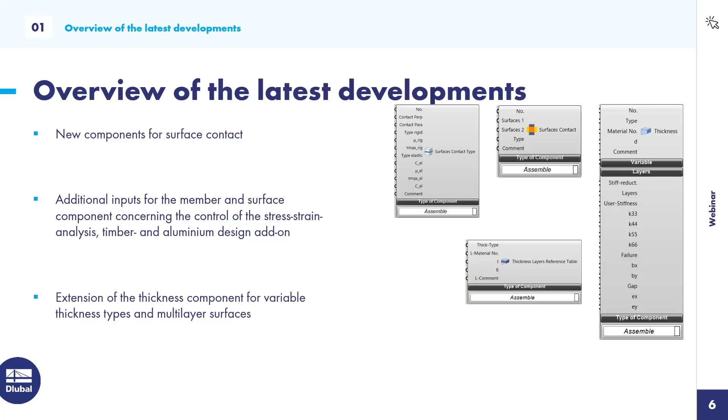The last feature that I would like to show here is actually related to the installation process in Rhino. So let me show you Rhino 8 in a second here. In the past, the plugin could be installed via a specific folder in the RFEM 6 program folder. We changed it. Everyone can install the plugin now via the Rhino package manager. So if you go into Rhino and you call up the package manager, you can search for Dlubal here, and you can see the Dlubal plugin, and here you have various versions of the plugin.

An important information for you: in case you're using Rhino 7, you should use the versions with the number 7 in the front. And in case of Rhino 8, use the versions with the version number starting with the 8.

For today's webinar, I'm using, let's say, an internal version. Anyway, you can do the exact same algorithm in the current customer version of the plugin. All right, then let's switch to the second chapter of today's webinar, the live demonstration.

To give you a feeling for what I'm doing in Grasshopper, I would like to show you the final structure first in RFEM, and then hop right into Rhino 8. So that's the CLT structure that I would like to model. It should represent a bus or train station, where you can wait for your train or for the bus, and you're protected against rain and wind and so on.

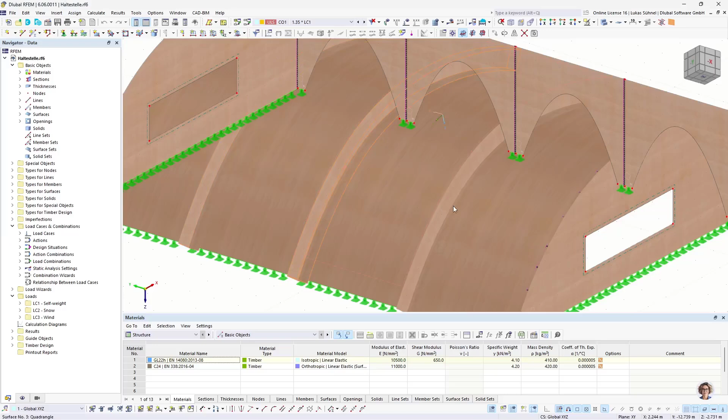So you have here these CLT wall, slab and wall elements, and inside some additional timber beams that support the roof, and on the front some openings to go to the train, and on the side some windows to see if the train or the bus is coming. Obviously a made up example, but it serves the purpose of today's webinar. I would like to show you the workflow and some new components.

What do we have here as well? We have some line supports on the bottom, and additionally some line hinges, because CLT panels are usually connected hinged. So we need the line hinges as a tool here to have the proper force transfer. That's also the most tricky part of this whole algorithm. I will explain it, of course, afterwards.

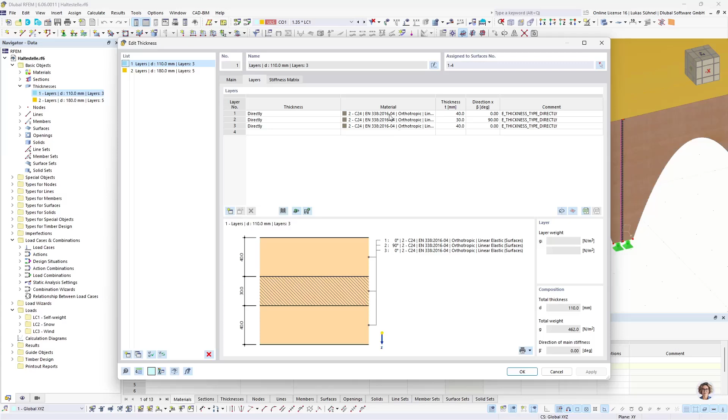And apart from that, we have, of course, our new layer thickness types in here, in which we then define the layers individually. All right. That should be it as a rough introduction of the structure. Let's go right into Rhino 8, and here I will put Rhino to the left and Grasshopper to the right in a second.

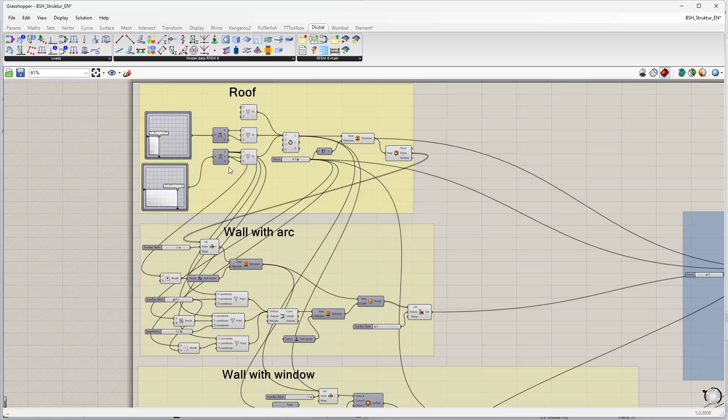One more little overview for you, what I will do in the next hour or so. I will create this algorithm here. We start with the Grasshopper algorithm, where I model the roof of the structure, then the walls with the arc, the wall with the window, then some data management, copying and so on, collecting my objects, the surfaces, the lines that I will use again afterwards, and then the connection to RFEM via our Dlubal plugin.

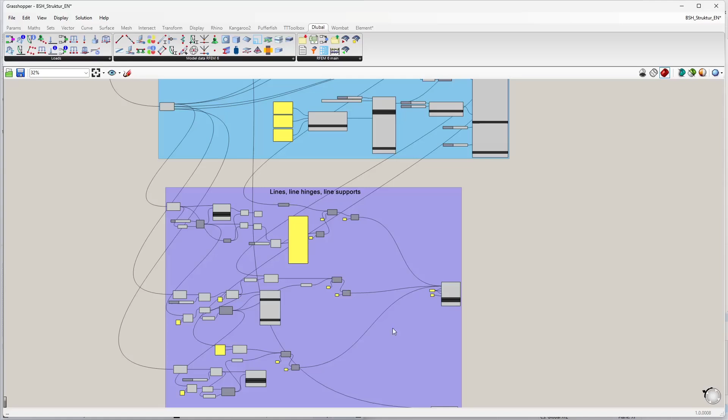I will create materials, sections and members, thicknesses and surfaces, and last but not least, lines, line hinges and line supports. All of those components then will be connected with our export component, and we get the structure in RFEM 6. All right, so let's create a new file in Grasshopper, move it to the right hand side of the screen, and start with the modeling.

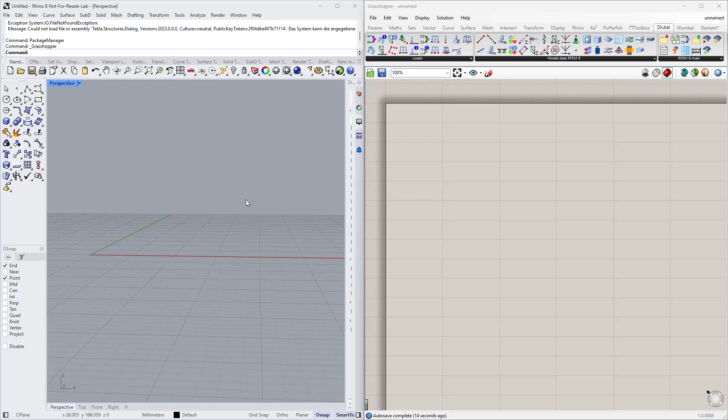As I said, I would like to begin with the Grasshopper algorithm. So I need a plan how to model that, and I will start with the roof. The roof was curved, and therefore I need some kind of a curve with the interpolate component. The interpolate component requires the nodes. You can see it basically on this little icon here. You need to define the nodes and then it will interpolate a line or a curve.

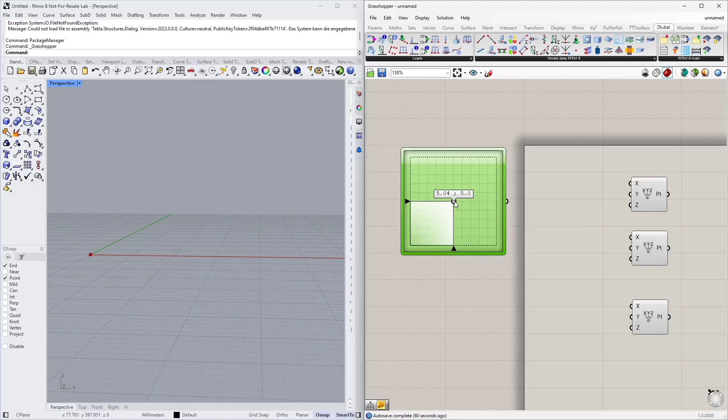And therefore I need 3 nodes and I use the construct point component for that. The coordinates of those nodes should be defined with MD sliders. This MD slider's properties will be changed a bit, so from 0 to 10. So with this slider I can define basically a node, a coordinate x, y, z. Z, however, is always 0 here, so I change x and y coordinates by moving this little dot.

Now my curve will be in the xz plane, therefore I need to deconstruct the node that I get here. So I deconstruct the node and I build it again, just using different coordinates. So x should remain as the x coordinate. The y coordinate, which I can modify here, should be the z coordinate. Actually that's already the second node, my bad. The first node should be at 0, 0, 0. So that's the first node here in the center of origin.

The second node I can modify now with the MD slider. And the third node should also be modified via an MD slider. So same logic. Y should be set. And now I can define this arc. Let's pick some proper coordinates. And now I can connect it to my interpolate component and I have a curve. So that could be the shape of my structure, for example. All right. Now I need a surface, so I can simply extrude this curve into the y direction.

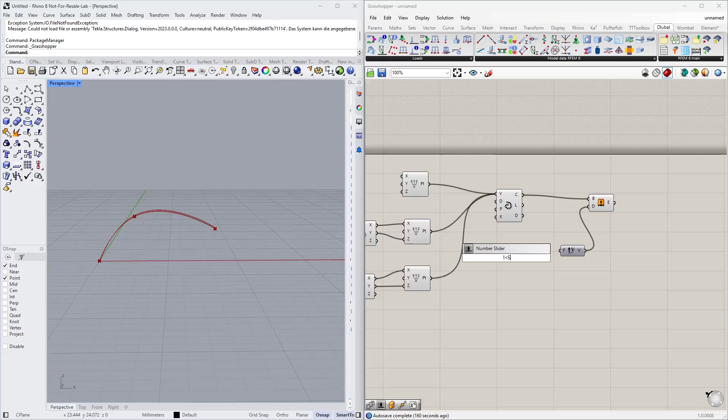And yeah, I want to define a distance via a slider, so I define a slider from 1 to 5, for example, using the metric units here in my head. So now I can extrude this line into a surface. All right, that's basically it.

That's already the first part of my little algorithm, and I group it, and for a better understanding I can give it a little name. So that's my roof surface, for example. Okay.

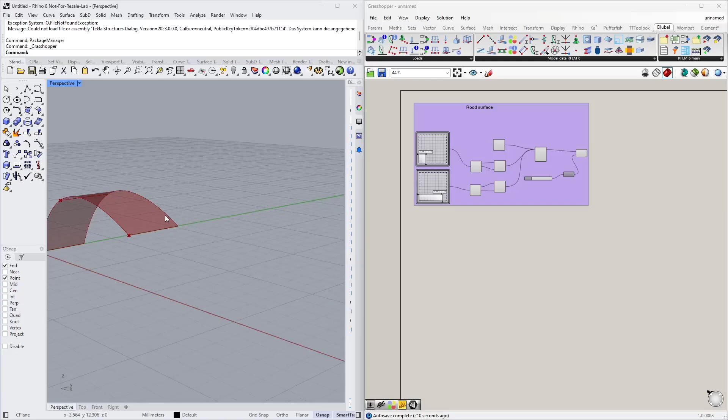All right, so second part is the wall on the front. Let me show it again in RFEM so you can follow easier. I want to create this wall now with the arc-like opening. So what I need for that is I need this line here, and I want to extrude it into the Z direction. To get access to this line, I will deconstruct that surface.

Therefore I have here the deconstruct brep command. I link it to my surface. Now I have here the faces, the edges, and the definition nodes, and I need just one of these edges, so I take a list item component, connect it here, then define the little slider to select the line from that list. Let's see which it is.

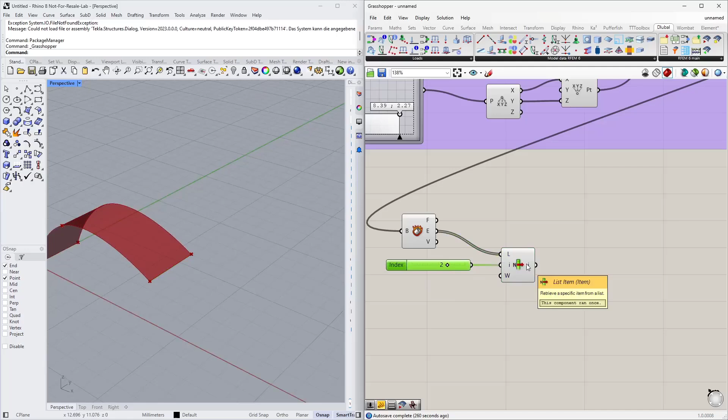Index 0 is the one on the end, on the bottom. Index 1 is this arc. Index 2 is the line that I need. Alright, so I have this single line in this component now, and now I simply extrude it again in the Z direction. And we can already see it is the wrong direction.

So I probably need to multiply it by -1, and the coordinate itself comes from my arc or my curve that I defined in the beginning. It's the Z component or Z coordinate of that node. So obviously the Y coordinate here, and multiplied by -1.

So we make a little multiplication component, and then it always has the right height. Yeah, so even if I play with my slider, the wall always gets the right height at the end of the day. All right, that's the first part. Now I need the opening.

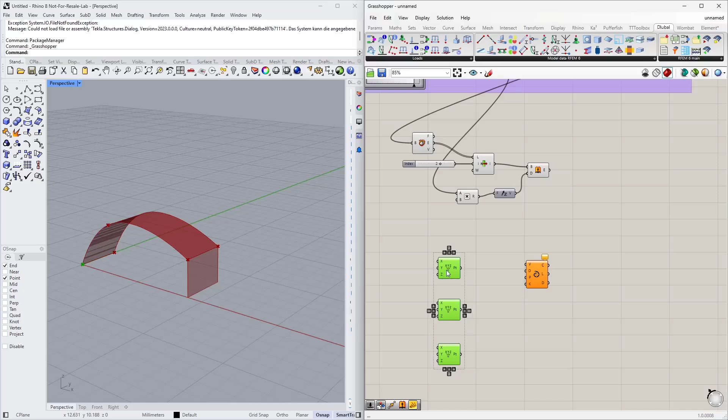For the opening, I also use the interpolate component again, and I need again 3 nodes. All right. Yeah, sorting can be done at the end of the day. All right. So where should the first node be? Basically, all of the nodes have the same X location as the wall or the end point of my curve. So the X coordinate is always the coordinate from the last point of my curve.

And now I need to modify the Y and the Z coordinates. The first node should only move slightly in Y direction, so I make a small number slider, and I want to have floating points, so I change the type of it and connect it to the Y coordinate. So this distance that I define here via this node is basically the length of my wall support on the bottom.

The second point should be in the center. Center basically means the dimension of the extrusion divided by 2. So divide by 2. Link it to the length of the extrusion, and that's my Y coordinate for the center point. And I need a number slider to modify the Z coordinate. All right. Maybe also with floating points, so like that.

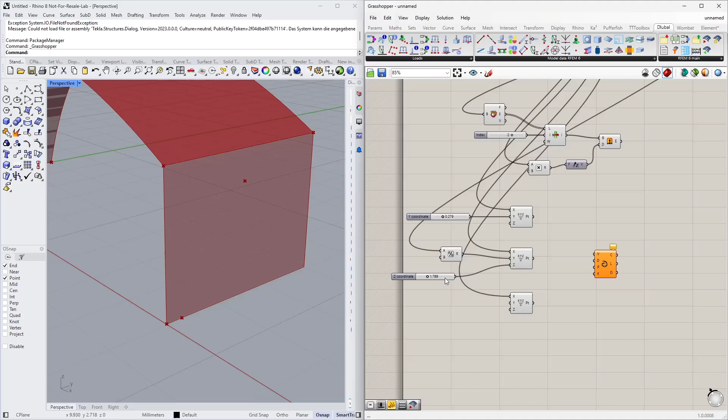And the last point is again on Z on the bottom of the surface, and it should have the same distance as the first point. So again, I just do a little subtraction. I subtract my required support length from the extrusion length. That's the Y coordinate. So whenever I change the length of the support, it will change on both sides.

All right, these are my 3 definition nodes for my curve. And now we can see it. The next step is, let's say, like a trim command. I would like to cut out this part of the arc from the rest of the surface. I can do that with the component split brep. The base surface is this one, and the so-called cutting shape is a surface.

So I need to extrude my arc again into X direction to get a surface for it. So actually extrude first, extrude in X direction. Yeah, just any surface, and now I can use it to cut the original shape. I get here 2 surfaces now. I just need one of them. So again, a list command to pick one of those indexes, and a little slider to select the right one.

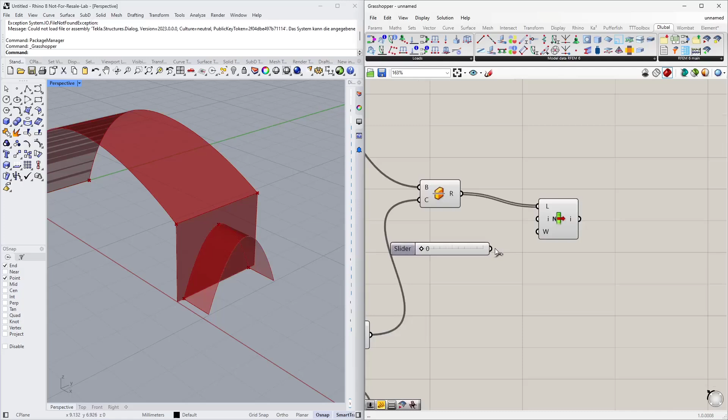So index 0 is the surface of the opening, and index 1 is the remaining surface, which is the one I want to keep. Let me hide some of the other objects to see the result of my algorithm. That's the remaining surface, the one I need for later.

So I already finished the second part here. Again, I could give it a name, like arc or surface, just so I can easily understand what I'm doing even a couple weeks later.

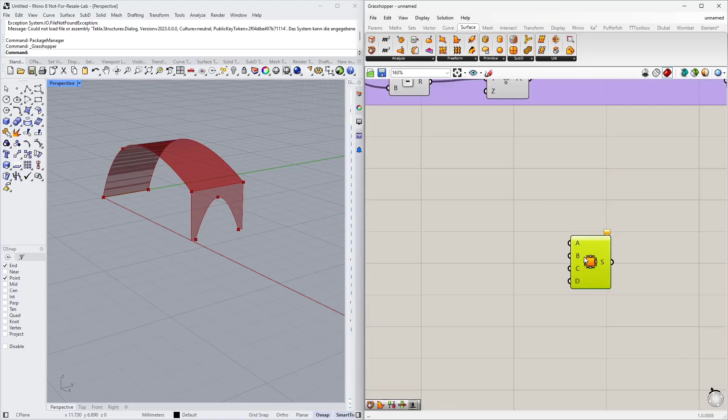And now the last surface is the surface in the front. To create that, I'd like to use the edge surface component. I only have to define the boundary lines. One boundary line is the arc, or curve, that I defined in the beginning from the roof. And the second curve for my surface should be this side line of my front surface.

So again, I deconstruct this surface here in the front, and I select this line here on the side, again with the list item component. Let's connect a slider to it, and now let's go through these lines to see which one it is. Oh sorry, the edge lines, obviously. So that's the other side.

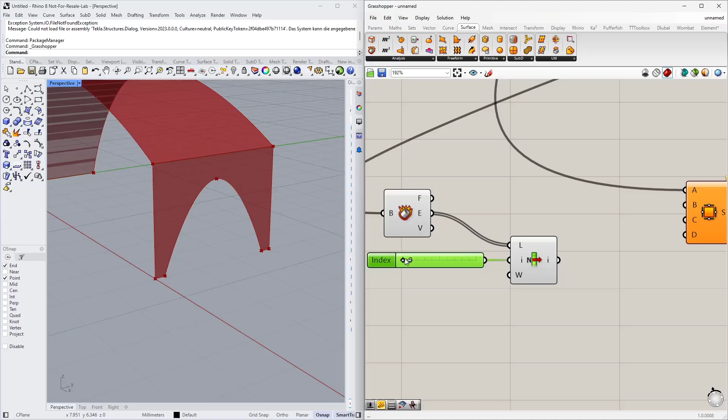Now I have it, indexed number 2. That's the line I need. So I connect it again to that surface component, and I already get the final shape.

So far so good. Now I need to cut out a rectangular hole in here. Same logic as before: I will create the rectangle in this case using 2 points, A and B. And then I extrude the rectangle and cut it again from the original surface.

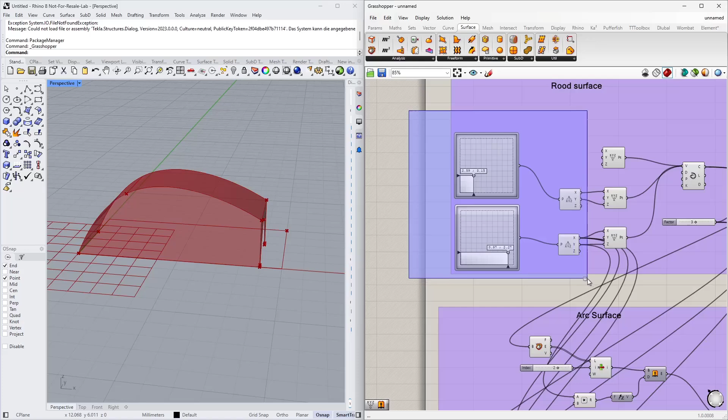These 2 definition nodes of the rectangle can or shall be defined again via an MD slider. So I just copy some of those things here, copy, paste, and reuse it down here. Actually, that's already okay. I can connect them as definition nodes for my rectangle.

The rectangle can be placed in any plane, as you can imagine. So I can define the plane by setting it graphically, or in the Rhino lock, or however you call this area on top. And I would like to have the rectangle in this ZX plane. Okay, that's now in the right plane.

Let's set some proper coordinates for the rectangle. Maybe that's the size of the window I would like to have. And now I have my rectangle here. Again, I extrude it.

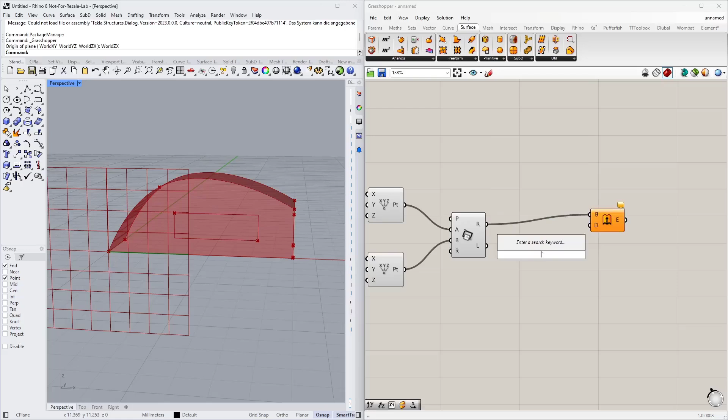Into the Y direction. And now I can use the split command again, split brep, to cut out a hole. Let me copy the list item that I defined on top here. Again, I want to keep only one of those surfaces, and this time I think it is index 0.

Exactly, yeah. So let's hide some stuff to see the result of our work here. That's the remaining surface with the opening, the rectangle opening. All right, that's already the basic geometry that I need.

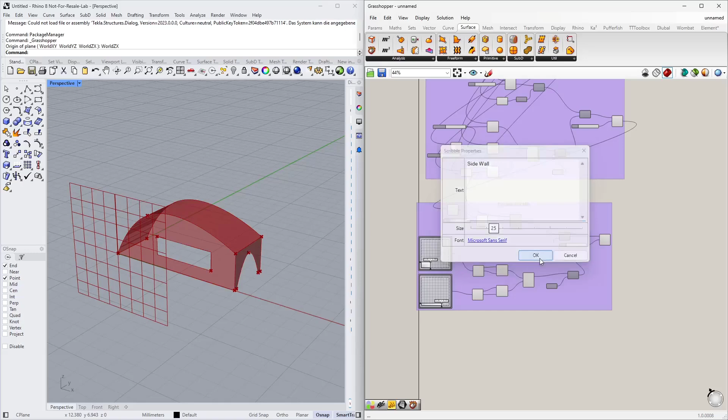And now I can copy this stuff. Sidewall, let's say. Okay, now let's copy the surfaces. That can be done with the move command or move component.

And which objects do I want to copy? Of course my roof surface and my front surface or surfaces. And the default is set, as you can see. Yeah, it's copying it in the vertical direction, which is not correct. I want to copy them in the Y direction.

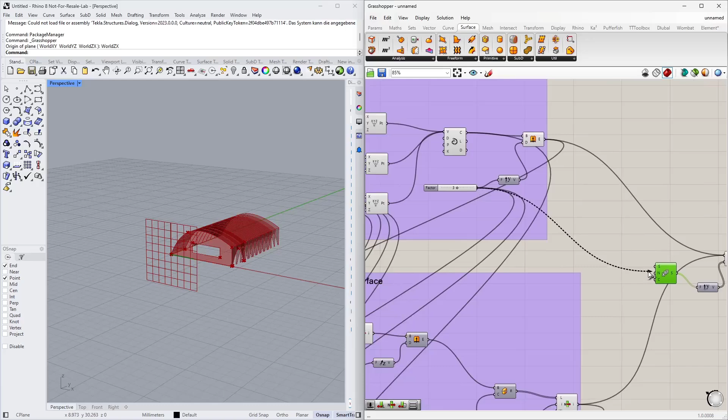And I want to copy them multiple times. For copying something multiple times, you can combine a move command with the series component. And as a step, I would like to use the extrusion length, to have them placed next to each other.

Now I can control the amount of copies with a small slider, let's say 4 copies. All right, that's a big part of the structure. Now I only have to copy the front surface to the end, so I use another move command for that.

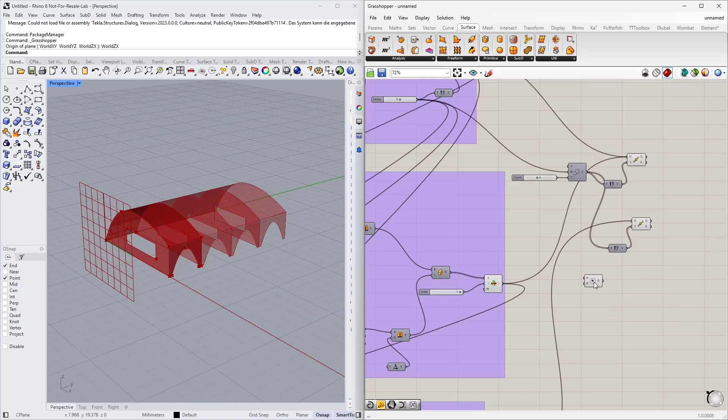And I copy this surface—of course, not multiple times, I only want to have it one time. The end distance for this is actually a little multiplication: we simply multiply the extrusion length with the amount of copies, and that's the length we need to copy it from the front to the end. Okay, so far so good.

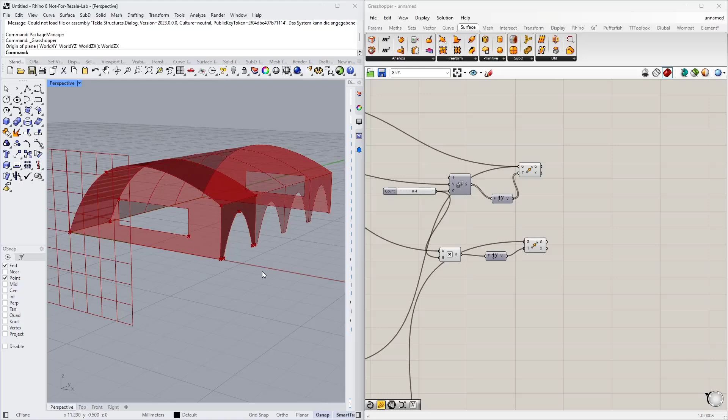The geometry is done. What I need now is a bit of data management, because afterwards, thinking of the RFEM 6 connection, I need a collection of lines on the bottom, all of those down here, because on those lines I'd like to assign a line support. I can use these lines in my line support component to export to RFEM 6. Additionally, I need these 3 internal curves, because I want to assign a member or cross section to them, and maybe also a collection of all the surfaces I have.

So maybe let's start with the curves for the beams. How do I get those? They are basically inside that component. This component contains all the surfaces from the roof and from the front.

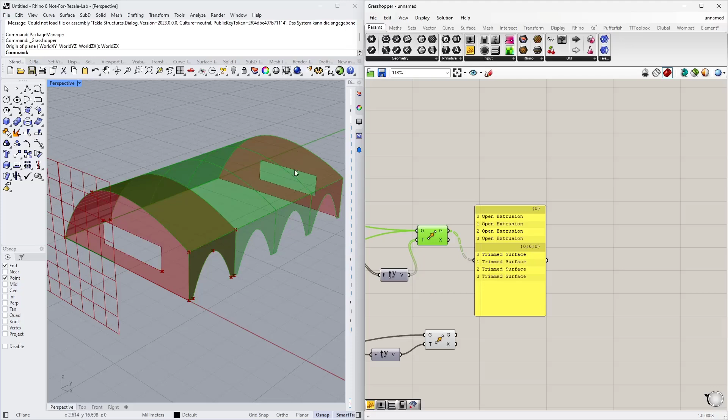Now if we take a look at the data in that component, we see it has 2 groups. Let's call it 1, 4 open extrusions—these are my roof surfaces, and in the second group, my wall surfaces. So what I can do here is explode this tree and get each branch, or get access to each of these branches. First branch, second branch. The first branch, as I said, contains the surfaces of the roof, and I can deconstruct them again.

So you can see it here again—those are the surfaces, and of course the boundary lines and so on. Now I'd like to select only these internal curves, basically just one of those lines per surface.

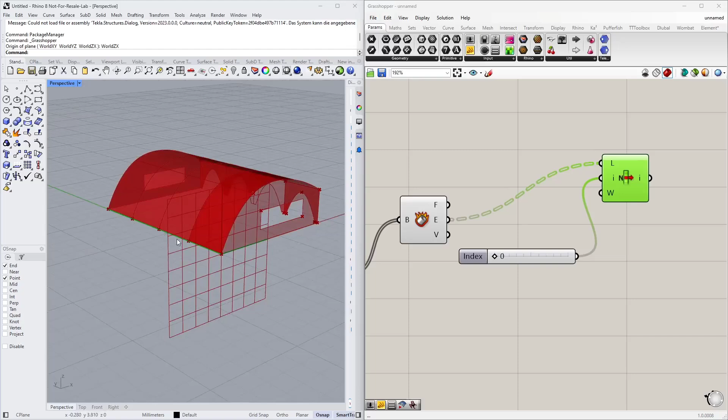So I need again a list item component from my edges, and let's see which index number it will be. Index 0 is the lines on the bottom—I need that maybe later for my line supports. I'm looking for the roof curves, and index number 1 is the one I need. It contains these curves, however it contains 4 and not just the 3 that I need.

So what I can do now is get rid of the last index from that list. Currently it is not a list, it is, let's say, a tree—on each branch I have 1 curve, but I can make a list out of it by flattening this tree. And now I remove the last index, using the cull index component. The last index can be defined by a panel with the -1 value, and the remaining lines are the ones I need for my beams.

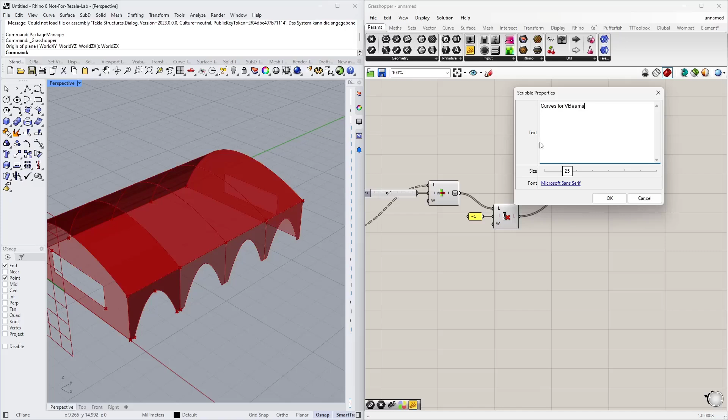So let me collect that in an additional component so I can easily reuse it afterwards. Maybe again a little comment here: curves for beams. Okay.

Now the second part should be the curves for my line supports. We already saw it in that component—here I can select the curves on the bottom of those roof surfaces. It was index 0, so that's already one part for my line supports. And the other bottom lines are included in the wall surfaces.

So basically I can copy this part, connect it to my surfaces here in the front, and now look for the index number of those walls—which of those lines are the ones on the bottom? So I scroll through that. Index number 1, as we can see, and now my slider isn't long enough, but I can tell you it's index number 5. So I need index 1 and index 5.

So I create a little list, 1, 5, and connect it to that component. This list item gives me now 2 lines, index 1 and index 5, and we can hopefully see that it's the line on the bottom, on the right and on the left side.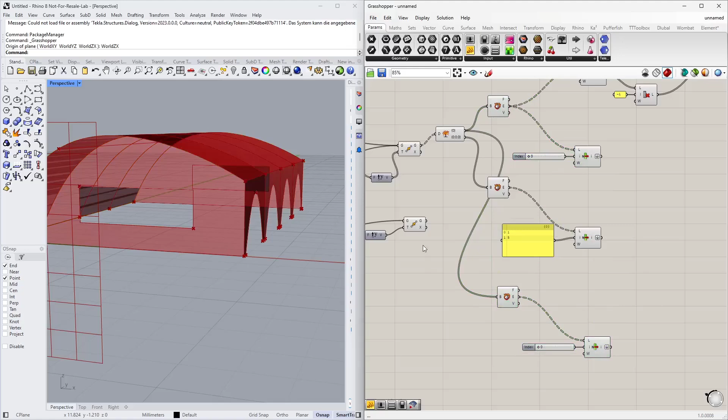Now I need the bottom line from the side surfaces. Same procedure—I copy again this part and connect it to, well, actually I need 2 surfaces: the front surface, which is down here, and also the copied surface from the back. From both surfaces I need 1 line—we can already see it's index 0. So in here I have now 2 lines, and these are now the lines that I need.

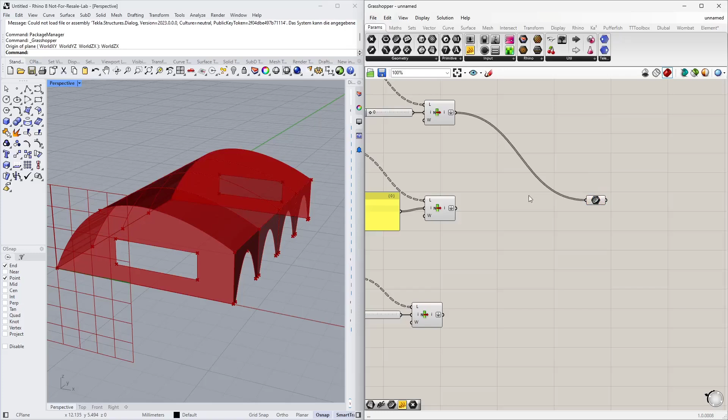I can collect all of them in one component again, so just connect them to the curve component, and that component now contains all the bottom lines for my line supports. So again, give it a little description: line support, lines. Okay.

And then I also collect my surfaces in a surface component, most of which I think are contained in that component where I copied them. Additionally, I have the front wall and the wall on the back, which is in here. So this surface component now contains all surfaces. All right.

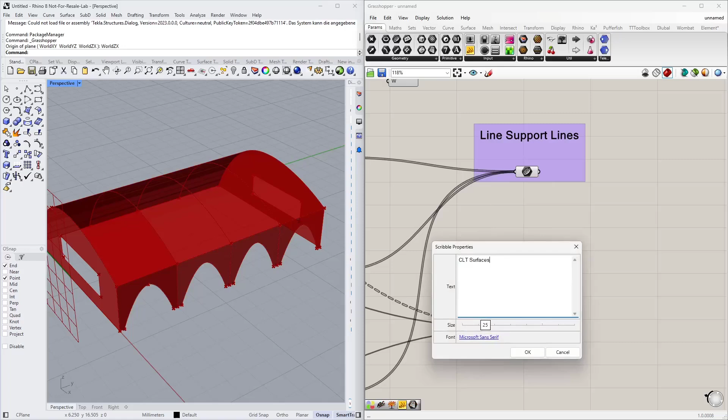So far, so good. Now, the next part is the connection to RFEM 6. For this I need my Dlubal plugin. Let me increase Grasshopper for a second. The Dlubal plugin will show up after you install it, and it is divided into 3 parts.

We have the model data group, which contains most of the basic objects: nodes, lines, members, surfaces, materials, sections, also components for solids, for thicknesses, and supports. I think most of the stuff that you need is implemented in here.

We have another group called loads. In here you have components to create load cases, load combinations, but also the loads: node loads, line loads, member loads, surface loads, but also imperfections, in case you want to assign them as well.

And the last group contains general components, for example the export component, import component, a component that allows you to run the calculation of RFEM 6 via Grasshopper, or other components. For example, in my internal version I use the global mesh setting component.

All right, how do we start? I think RFEM gives us a nice hint here. The data navigator in RFEM shows us the basic objects and then specific object types for nodes, and it's kind of the logic that you use when defining your structure. First you define materials, then the sections and the thicknesses, then you continue maybe with members and with surfaces and solids and so on. And we use the same logic in Grasshopper.

The name ideally equals the name of this table down here, so you can define your material in RFEM and copy the name. By the way, to get the full name, you can check the program options and see if you have the full section and full material description activated. If you do not have this option activated, you only see GL22H - the code related part of the name will not be shown.

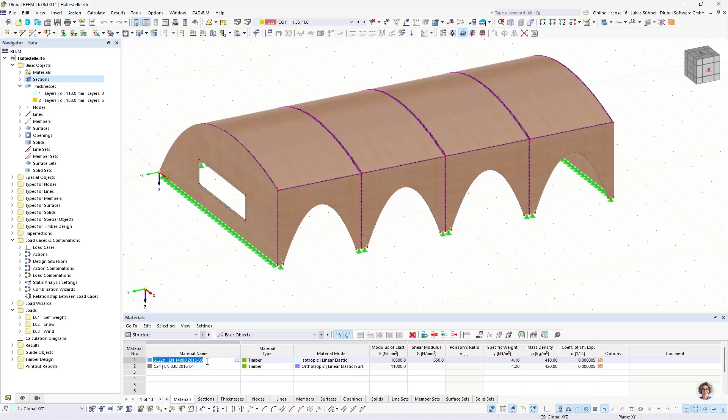But to have a clear assignment of a material, you also need the standard. So we can copy that name and paste it into Grasshopper. Alternatively...

...if you had previous projects and already defined materials and sections, you maybe already created a little library of materials and sections that you use again and again. And that's what I did - I defined here a value list and put my own information into that value list. You can do it by editing this value list and then just inserting the names into it. That's the name that it shows here, and that's the name which is behind that little description. It's identical for me here, but you can simply copy these things.

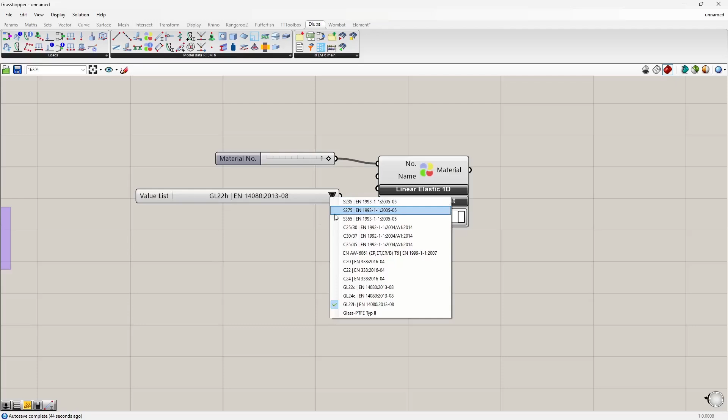Then you select the material that you want from that little list and assign it to the name input, and that's all you need to do. I copy my material - I need a second one. Make sure you change the index number.

Then I select here the material C24. The first material is for my beams, the second one should be for my CLT surfaces. And for surfaces we have to use the orthotropic 2D material model - that's what I want to use at least. So I use a value list to read the options of this material model input and select orthotropic 2D.

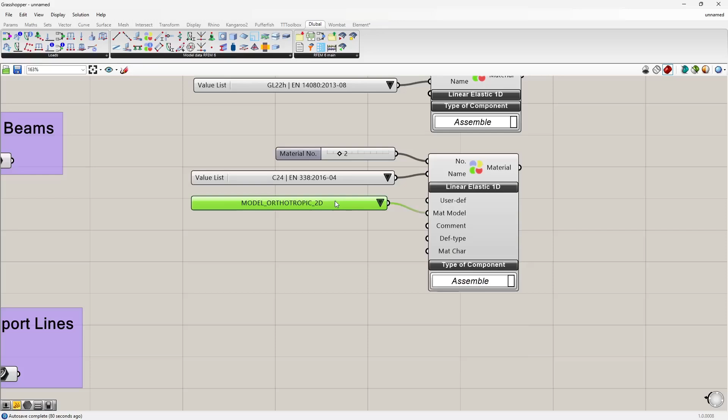All right. Now, next step should be the definition of a section. Therefore, we have the section component, the section for my beams. And again, I assign a name, a number, and I have to assign a material and the name. The material I can link directly from the material component to the section component.

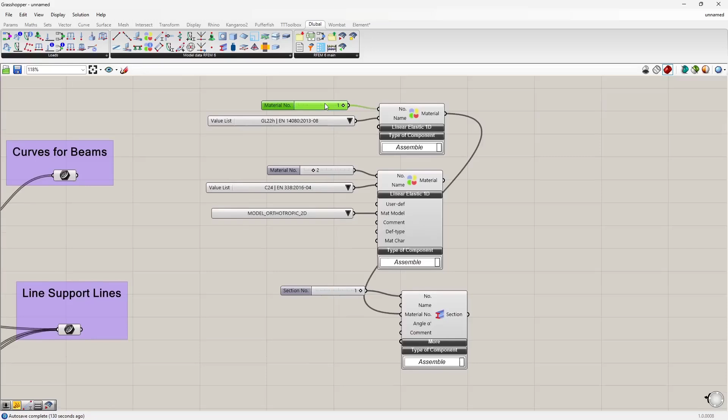This step can only be done if I define the index number first. Because what we expect in this section component is the material index number, 1, 2, 3, 4, 5. And to transfer it from that component to this one, I have to assign it here first. If I do not assign it, this connection will not work. That's why, personally, I usually define all these index numbers for all my components, so I can link them together. Now, the last thing is the name.

The name is quite easy. It's an RM1, rectangular massive section, and then the width and the height. And I could copy the string and paste it into Grasshopper, or I build it parametrically. The name is just a bunch of strings combined, basically, text fragments, and the name consists of the part RM1,

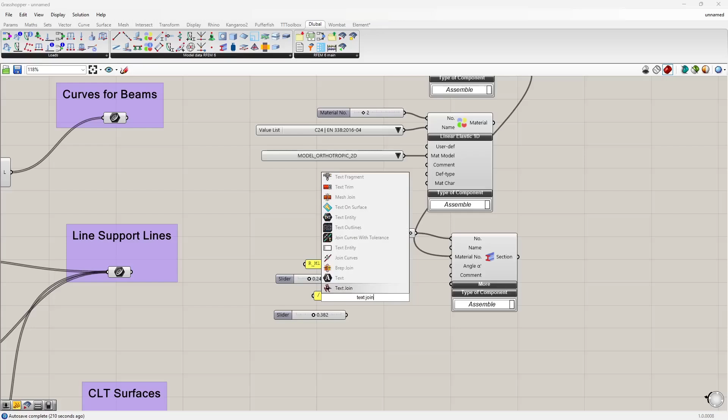then a value for the width of my section. And I use here a slider from 0 to 1. I explain it in a second. Then the next part of the name is the slash, and then another slider for the height of the section. All these parts of the name can be joined by a text join component. You just plug it into this input here. And you get the name, or you get one string out of it.

Let me show it. Here we are missing the space. Okay, so that's now the name according to RFEM. There is just one little difference. You can see here I'm using, let's say, meters, in my mind, 0.24 meters and not millimeters as it is shown in RFEM. This has the following reason.

The Grasshopper link is based on our web service, on our API, and this API expects SI units. So I have to define the dimensions of my sections here in meters, so that I get the right size in RFEM. Therefore a scale between 0 to 1. Now I can link it to my name input and the section is done.

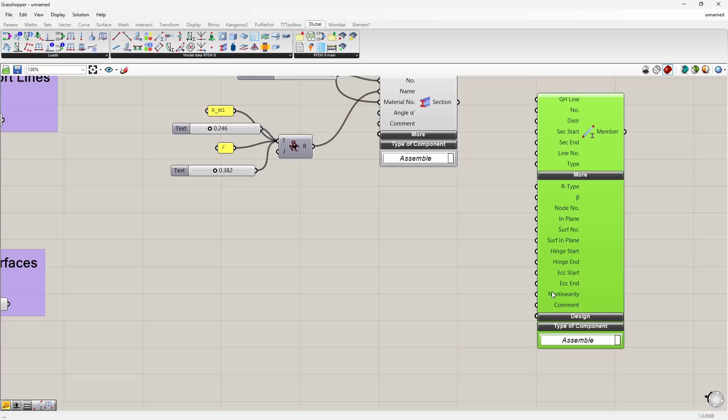Last step for this first group here is the member component. Let me show that too. A member component with some basic definition inputs. Under more you can find options for hinges, eccentricities, nonlinearities or rotations for the member, and under design related inputs. Let's start at the beginning.

I need the Grasshopper lines for my members. These 3 lines. Let me rotate the structure. These are the 3 beams, and I already collected them in here. These are the curves, and I connect them to my member component. The section should be this rectangular section, and that's basically it.

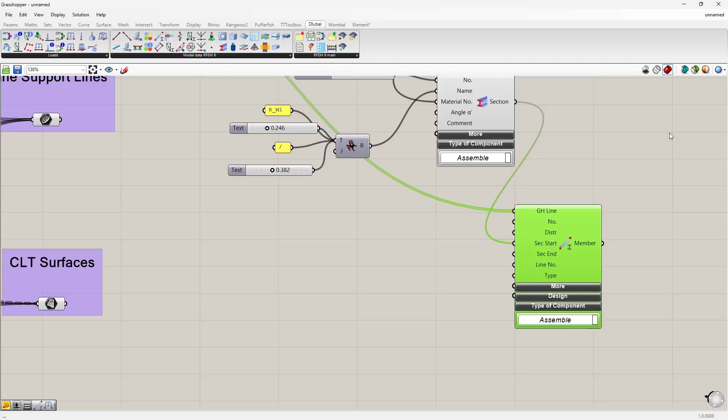There's just one thing that I want to define in the member, and that's related to the design. I have here timber beams, and I would like to feed already some timber design related settings, so that when I export it to RFEM, I have, let's say, most of the information already defined for the design, and I just have to calculate it.

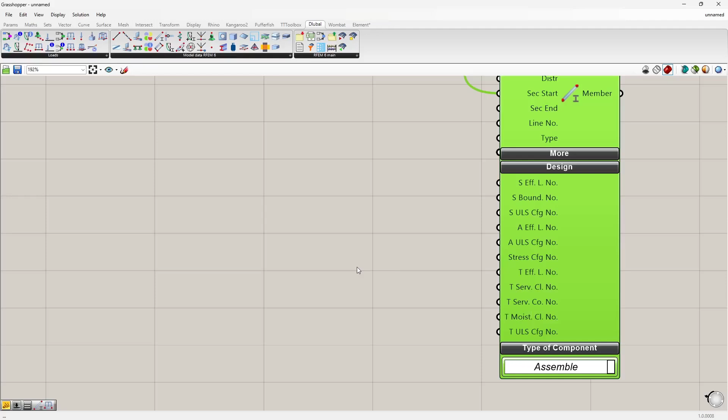So I have some inputs here, as usual for steel, A, aluminum, then T for timber, and for timber I can define the type of the effective length, or the index number of the effective length type, and the index number of the ultimate limit state configuration, or the index number of the service class. I can't define these classes in Grasshopper, but I can define the index number of the existing type.

And now you may ask, which existing type? We never defined them. That's where the templates come into play, and I will explain at the end of this webinar how it is working. So let me define these types. I used index number 1, and again, more details I will show at the end when I explain templates. So that's already my first part. Let's group it. Materials, sections, and members.

Now the second part for my connection to RFEM are surfaces and thicknesses. Let's have a quick look again at RFEM. So usually the main input for a surface is the thickness type, what material and which thickness is defined in here, and it will be assigned to the surface.

So let's have a look into the thickness type itself. Here we have different types: uniform, for concrete slabs, uniform thickness type, variable, and also layers. In case of layers, we have a table included where we define each layer, the material, the thickness, and the direction of this layer. Okay, that's what I have to define here in Grasshopper. So let's start with the thickness component, which we have here.

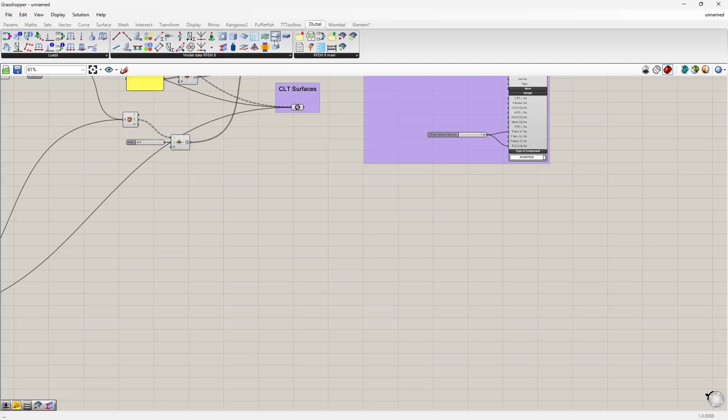And the thickness component, again, needs a number or an index number. Then the type, I can use the value list for that. In 99% of the cases, the tooltip will tell you what kind of input is required. You can see it here, value list. So I connect it, and I can select here layers.

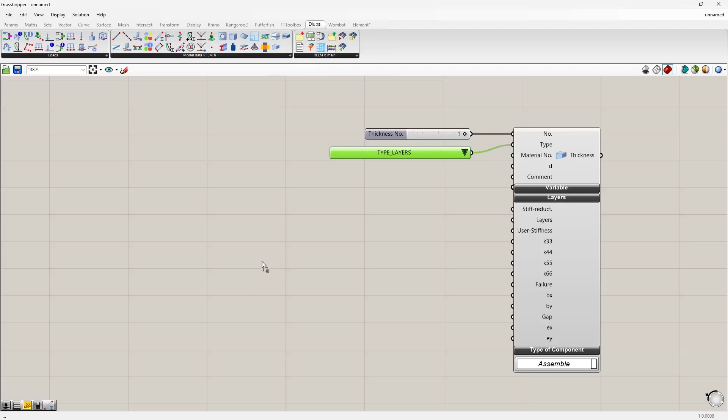In case of layers, I can open the layers tab in this component, and here I have the layers input. The layers will be defined in an additional component. Yeah, we had to split it up. So in that additional component, I define the material, the thickness, and the direction. This little table that I displayed in RFEM 6, and this information will then be transferred to the thickness component. All right, the material should be material number 2, C24, orthotropic material model.

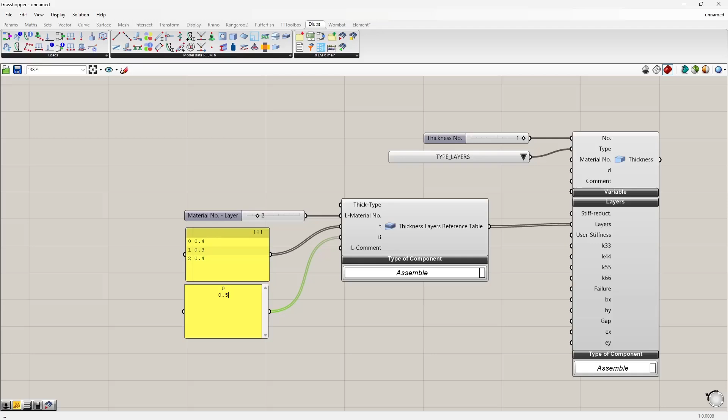The thickness can be defined in a little table. Let's say 0.4, 0.3, again meters, 0.4. And that should be a list. And the same logic for my rotations. The direction of each layer should be 0, 0.5 multiplied by pi, 90 degree, and 0 again. Okay. This is this little subtable which I showed in RFEM, and it is connected to the thickness component.

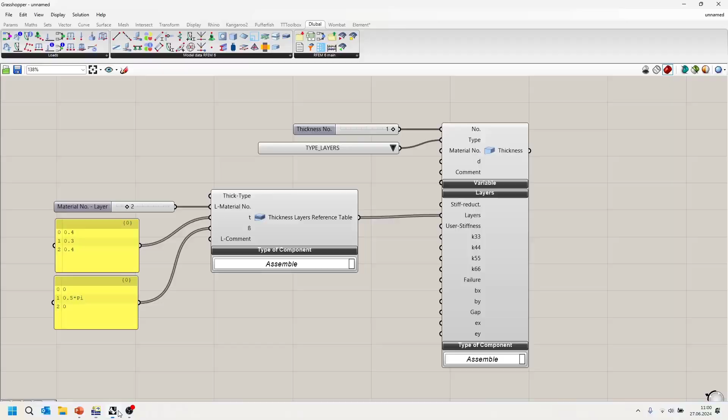We have a lot of additional inputs in here. I can show them as well in RFEM. I do not use them today, but in case you want to apply a stiffness reduction to these CLT thicknesses, then you can activate them with this button, and then you have access to these modification factors and additional options, and all of them are included in our component, as you can see here. So that's the thickness that I want to create.

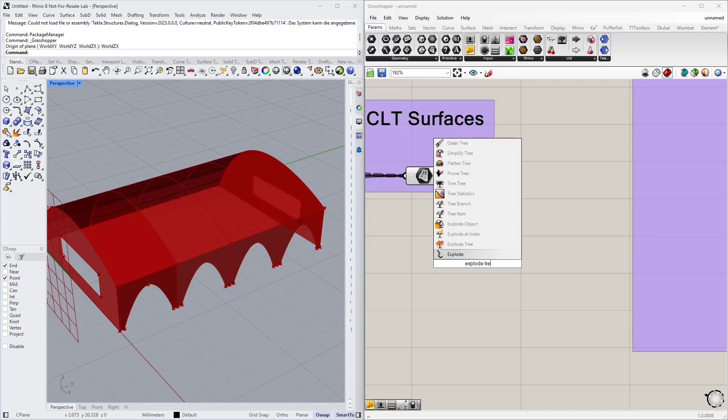Now I need to connect it to a surface component, and the surface component expects additionally the Grasshopper surface. Now I want to use that thickness type for the roof surfaces. That surface component here contains all surfaces, again in a tree-like structure. I showed it before. 3 groups. My roof surfaces are in group 1, so what I will do here is I explode the tree that I have here and use, I need it later as well, the surfaces from the first branch for my surface component.

The last step here is the numbering. As I said, I tend to number all my surfaces, so that can be done with the series component. This number, the index number, starts with the value 1. So I define here for the start index number 1. The step is of course 1. 1, 2, 3, 4, and the amount of index numbers that I need is linked to the length of this list. I have here 4 surfaces inside, depending on how many copies I create in my Grasshopper algorithm. So the length of that list is basically the amount of copies that I need.

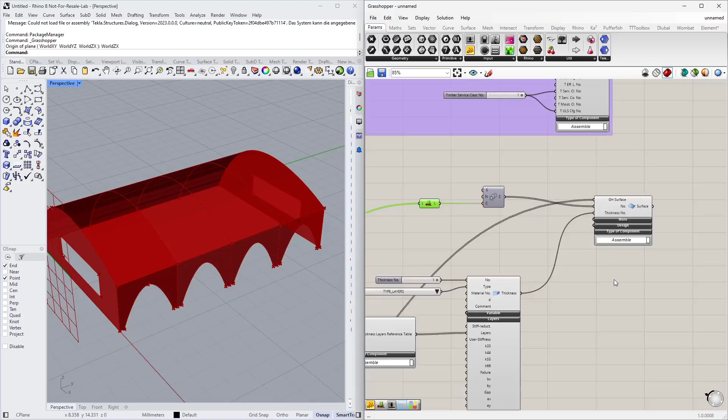So I can count the length with the list length component and connect it here to the amount of copies. And now I get a list of 4 index numbers, 1, 2, 3, 4. That's what I need for my surface. All right. That's the surface component. And now I need another surface component for my walls. So I simply copy all this stuff. Copy paste.

This time I want to use the remaining surfaces. So these are my front surfaces and these are my surfaces from the side, and I connect it as Grasshopper input. Concerning the thickness for the walls, here I would like to use 5 layers, so I simply copy them. Okay, same for the directions. And I need to change the index number, obviously, of my thickness. That's the second thickness, so index number 2.

Again, the remaining part is the numbering of those surfaces. I will use a series component again, but I'm not going to start from index number 1 as I did before. I need basically the last index number from this numbering plus 1. So that's not difficult. The last index I can read via a list item component, and I select here the last index, using -1. So I get the value 4 out of this component, and then I add 1 to it, so +1. And now I have here index number 5, which is parametrically defined depending on the amount of copies and so on. And this is my new start value for the numbering of my walls.

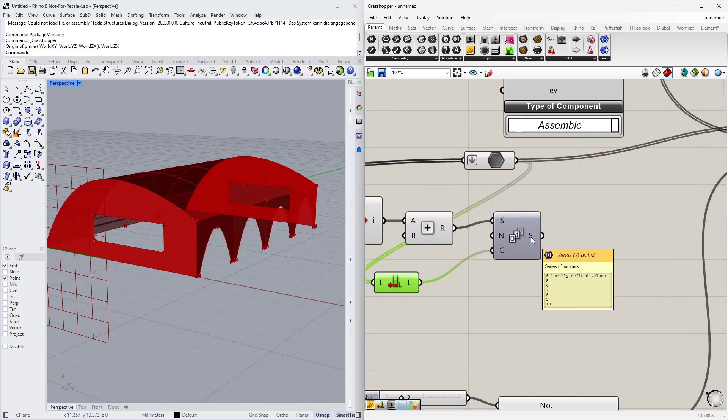Here it is. The length of that list is again the amount of copies that I need. So I have here the numbering 5 to 10. So that's exactly what I need. 6 values for the numbering, 6 surfaces.

That's good. All right. One more thing that I would like to define in here is a mesh refinement. Why? Simply because the default global FE mesh length is 0.5 meter. We have here a distance of, what did we define, about 0.3 meters. So let's have at least 3 elements over this length here. So I would like to use an FE mesh length for those wall surfaces of 0.1 meters.

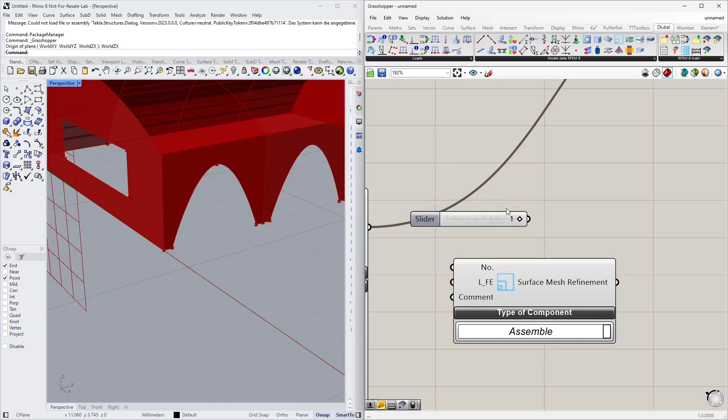Therefore, we have these mesh refinement components. Here's the surface mesh refinement component. I assign the index number and the required length, 0.1. All right, and I simply connect it to the mesh input.

Now, what I forgot also on the surface on top is those are timber surfaces, obviously. And again, I would like to define some things for the design afterwards, the service class and also the ultimate limit state configuration. Therefore, I assign here types number 1 for the ULS configuration, and the same here. Let's extend the design tab, ULS configuration, service class. All right. Again, explanation will follow afterwards.

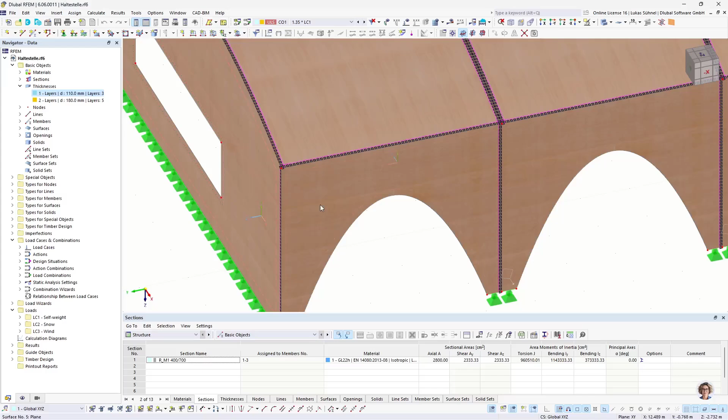Now, this is the second big group for the connection to RFEM 6. And now the last part, which is related to the line hinges. This is the most tricky part, I would say, in that example. Let's have a look inside RFEM, how they are defined. Line hinges, as I said, control the force flow between surfaces. And we find them under types for lines, line hinges. I have just one type here for all of the surfaces.

And what we can control here is the hinge conditions, which force should be transferred and which not. In my case, I simplified it a bit. I say it's just free about the rotation of the local x-axis. So basically along the line hinge, the rotation about this axis should be free, and the rest should be fixed. That is easy to define in Grasshopper, that's not the issue. The difficult part is this string on the top here. How is it set up?

It is set up in a way that we have here the index number of the surface where we want to have a line hinge, and then the related lines. So for surface number 1, lines 2, 3, and 4. For surface number 2, lines 6, 7, and 8, and so on. And this is split by a semicolon and a space, and then the next group of surface and lines comes. So somehow I have to build this string in Grasshopper, and therefore I need the index numbers of my surfaces and of my lines where I would like to have a line hinge.

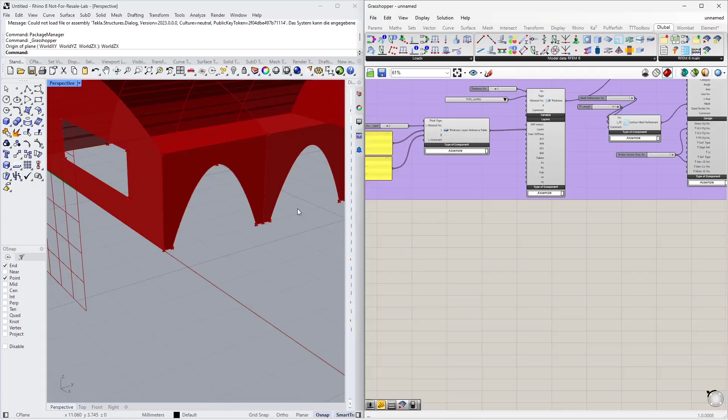So let's have a look again at Rhino and Grasshopper. I do have a numbering for my surfaces. Yeah, I did that here. But the lines where I would like to have a line hinge are not numbered. So let's start here. I assign an index number to my lines. Therefore, I use this line component here. And the line component requires the Grasshopper line and the index number that I want to assign to it.

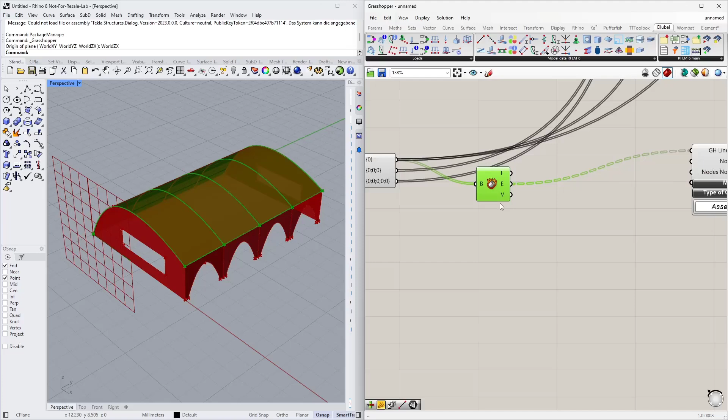The lines for the roof are included in the roof surfaces. I did it multiple times already. I can deconstruct those surfaces. I get here the edges of those lines, and I can simply say these edges should be numbered, and the number should be starting with the index 1 until the amount of lines that I have here. So I need a series component.

The series component, or the number, should start with index number 1 again, and the amount of copies depends again on the list, or the length of this list. Let me show it quickly. I have here 16 lines, but grouped again. So what I will do is I will make a list out of that group. List length.

So I want to use this list. However, I flatten this tree to get a list, and the last index, 16, I will use for the count. So I get now the values 1 to 16, and these are my index numbers. Sorry, wrong input. Here, number. I also flatten this input here for the Grasshopper line because I need to combine list and list. Otherwise, I will get more lines afterwards. So I have to combine a list with a list.

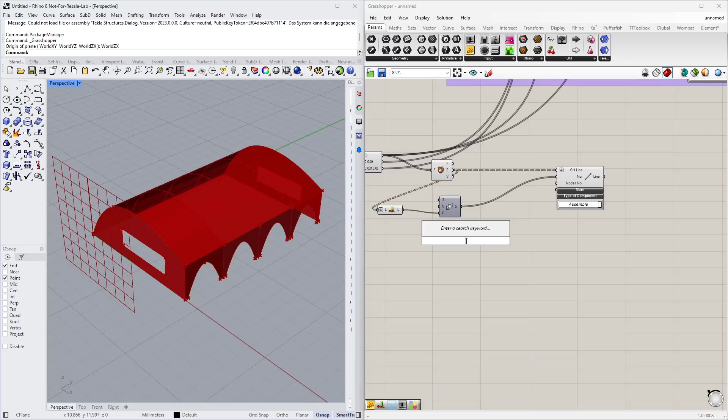So far so good. All my lines from my roof surfaces have an index number now. And now I somehow need to combine my surface index numbers with my line index numbers. How can I do it? I can do it maybe by collecting the numbers of my surfaces again down here. So this series component, if you remember, contains the 4 index numbers for my roof surfaces. So let me simply bring them down here. So again, I have the same list now here.

And let's have a look how the values are shown. I have here the list with the 4 values, and I have here my 16 index numbers for my lines. If I want to group them in a way that I have always surface 1 with related lines, surface 2 with related lines, a tree-like data structure would come in quite handy. So what I can do is I can graft my numbering to a tree. So each index number will be transferred onto its own branch. You can see it here now. Each of these branches from my tree has 1 value. So I have some kind of grouping now.

And the same grouping I need for these numbers. I would like to have the lines that are related to one surface in one group. I have it already somehow. I have it here. Each surface has these 4 lines, or they are grouped, let's say. And this grouping I would like to assign to my numbering here. How can I do it? I can deconstruct the path. Oh, wrong. Deconstruct path. I can deconstruct the path that I just showed here, where the lines are grouped.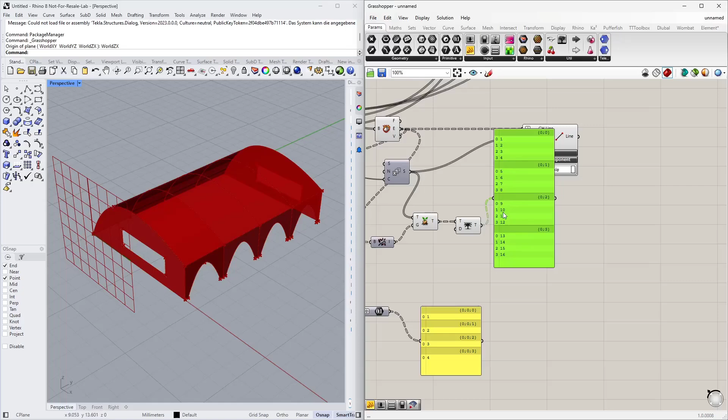Before I do that, I have to get rid of one of those index numbers, because I do not need a line hinge on the bottom lines. I have a line support down here. There's no reason for a line hinge. So I get rid of the index number 0, which is always the bottom line for each group. Easy task, cull index. So we remove one index from the list, the index with the number 0. So now only 3 lines will remain here.

And how can I build the string that I need for my line hinge now? I can use the text join component a couple of times to get the desired result. The first thing is I need these index numbers, the line numbers, split with a comma in a string, not in a list as I have it here. So I join them, and each value should be divided by a comma. So let's see the result of that. 2, 3, 4, 6, 7, 8.

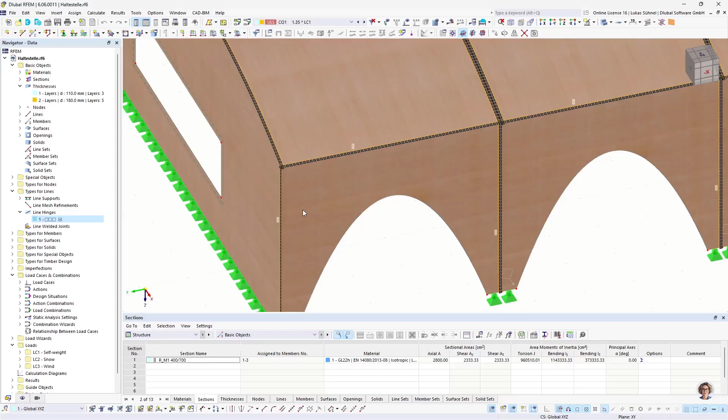Yeah, surface 1, line 2 to 4. Doesn't matter if we have here 2 to 4 or 2, 3, 4. RFEM will accept our description method, and so on. And now I need it in one long string, or that's my requirement at least.

So I will flatten this result and join it by a semicolon and a space. Okay, and now the result looks like this. And this is exactly how it looks in RFEM. So

far so good. Now let me use a line hinge component, assign a number to it, assign this string to it that I just created and define the connection. So I would like to fix all forces in each direction and release the rotation. Yeah, you get the information as a tooltip in here.

Free, so free rotation is defined by the value 0. Rigid can be defined by inf for infinite, and any other value will be in Newton per meter, in case of a spring. Okay, that's all regarding the line hinges. By the way, we have also non-linearities for that, so always check out the more option if you're interested in additional settings. And due to the time, I have to stop here.

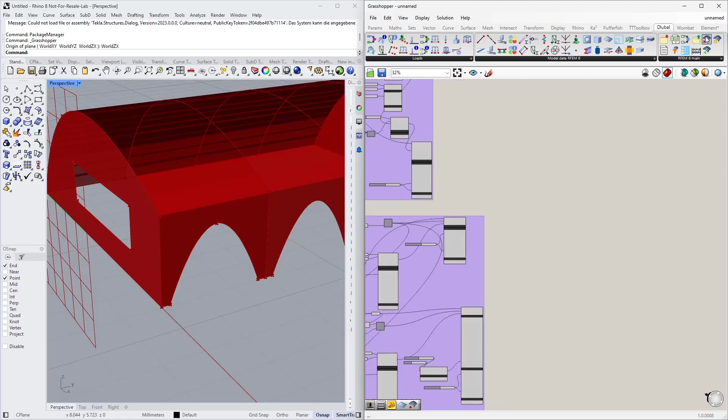If you did all that, the next step would be to connect it to an export component. We have it here. That's the export component. Which inputs are required for that? I tend to use a Boolean toggle to run the export. I set it to true if I want to start the export. And if you leave it on true, it's like a live link. Whenever you change something in Grasshopper, it will trigger another export, or you just set it back to false to

stop it. The input, that is basically the connection between all our Dlubal components. So each of these Dlubal components have to be connected to the input. Oops. Yeah, I will skip it here because I will switch in a second to my final example, but you can imagine what you have to do here. And then we have some additional options.

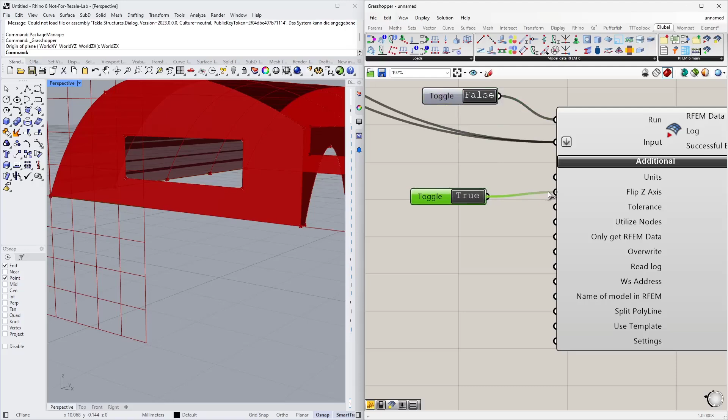Flip the z-axis, which I usually use again via Boolean toggle, because the global z-axis in Rhino shows upwards, in RFEM, at least in my case, downwards. So I flip the z coordinates here. What else do we have? We can define the name of the file in RFEM after the export. Yeah, I don't know. Example. So if I export it in that way, the RFEM file will be named example afterwards.

And the last feature that I would like to show here is the use template function. I mentioned it a couple of times when I defined my members or surfaces, and it's quite a strong tool, I would say. As you probably noticed, not all of the objects that we have in RFEM can be defined in our plugin. We are working on that. You saw it in the beginning. We extended a couple of components, we defined new ones, but not everything is included in here already. If there's something missing, then you can't use it, obviously.

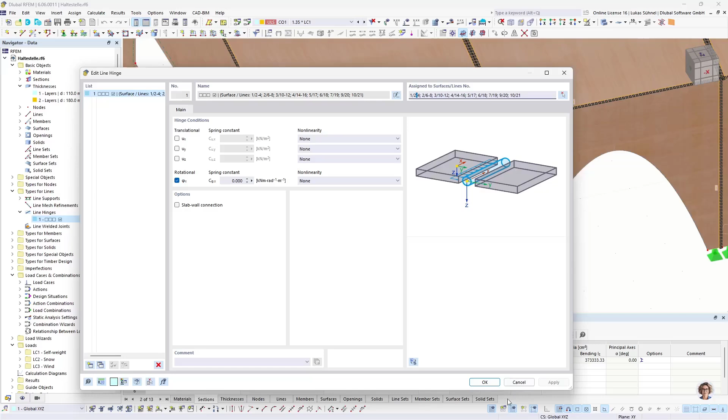But we thought, okay, maybe it would help if you can use a template from RFEM. What's that? Let me go into RFEM quickly. A template is basically a file which already contains specific things. So what you could do, for example, is you could create a new RFEM file. Imagine that's a new RFEM file, and you define some things in there. Maybe some materials, or maybe some sections, or even

you define already the load cases in that file, the load combinations, or add-on related stuff. You define here the service class types that you would like to have, or the ultimate configurations for the timber design. You can define all of that in advance inside RFEM. And not only just that, also the add-ons that you want to use in that template. Multi-layer surface add-on, timber design add-on. All these settings can be saved inside a template.

Save it as a template, a file you can put anywhere you want, and then link that template to our export. Or you use it in RFEM itself. So when you create a new model in RFEM, and it should not be empty, you can say please read the data from my selected template into that new file, and you don't start from scratch.

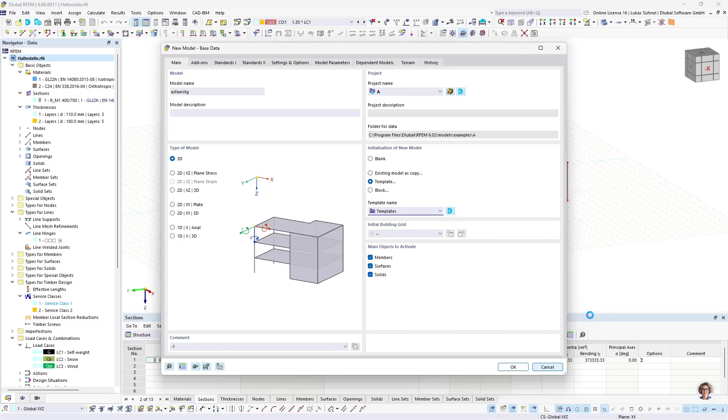You already have your load cases, combinations, materials, whatever you defined already. And that's the same logic that I use in Grasshopper. Before I run the export of the data I defined here, I can read the information from a template, and I can link this template via the path.

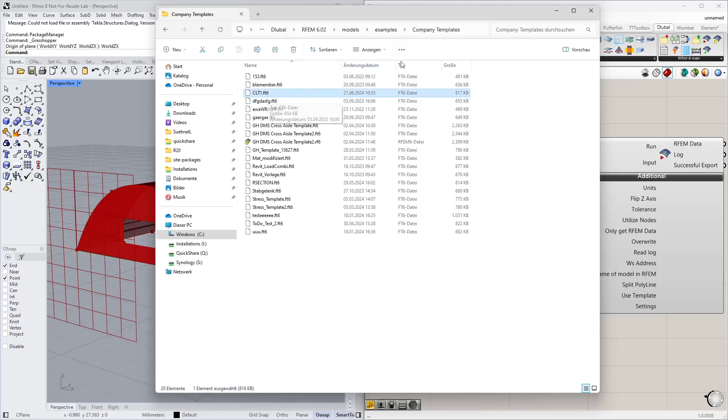So I go into my Windows Explorer - now I have to remember where I put it. I think it's under the programs, Dlubal, RFEM 6.02, models, RFEM 6.02, models here. Example, I think company templates, and here's my template CLT1. So I copy the path.

Put it in a panel, add the CLT1 FT6 - FT6 is the ending for templates of RFEM 6 - and I link it to my template input. And now when I run the export, it will read first the information from the template and then the information that I defined in my components.

And since it reads the information from the template first, and I already defined a timber class in that template and a configuration for the timber design, I can simply use the index number of that type and assign it to my surface, to my member, whatsoever. So I don't have to define it in Grasshopper, but can use it from the template.

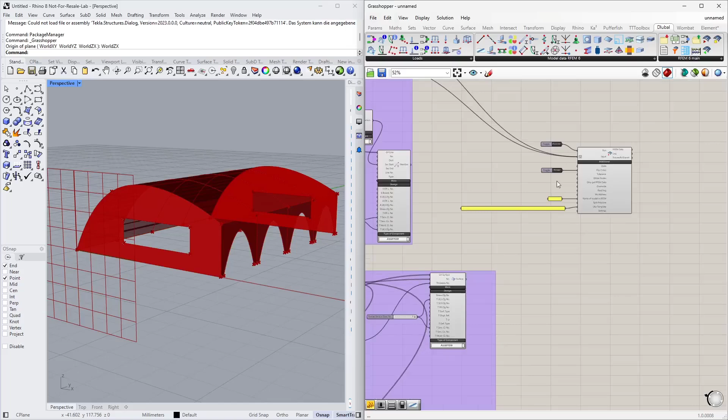Yeah, so far so good. Let me show the final - no, that's not the final, the final algorithm. We did all that here, and a part of the last group, yeah. These two definitions are missing due to time, but I think it's anyway clear how I did that.

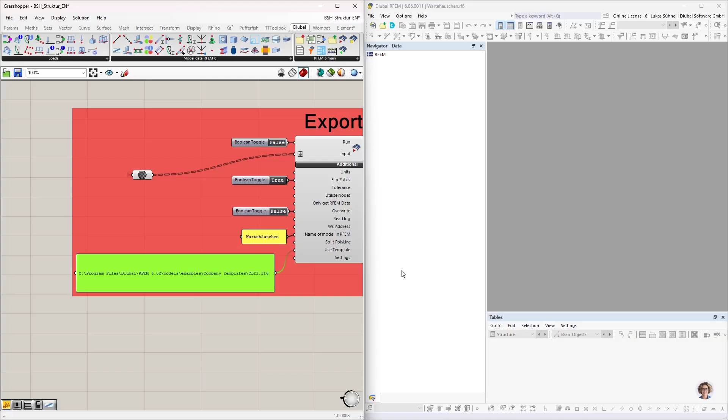And now we can run the export, and I would like to show that at least once. So let me put it on the right hand side. I close that file, and now that's the path to the template. I can change it to true, and we should get the file in RFEM. It's creating a connection with RFEM,

reading the data from the template. You can see it already here, load cases and so on are defined - that's part of my template. And then it will create materials, sections and so on based on the Grasshopper algorithm.

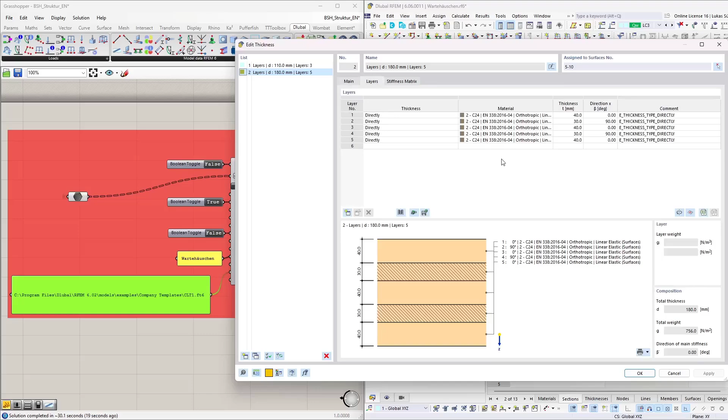All right, I disconnect the connection and I can see my file here. I have the geometry that I expected, my surfaces with the openings, my thicknesses with these layers that I defined before. Yeah, and that's already a file I can calculate.

Let me maximize it for a second. I can generate the mesh. In this predefined algorithm, I used the mesh refinement of 0.2 meters - that's why I have just 2 elements and not 3 over the width. But you can clearly see that the mesh refinement has been defined on these walls, except for the roof where I have the global FE mesh settings.

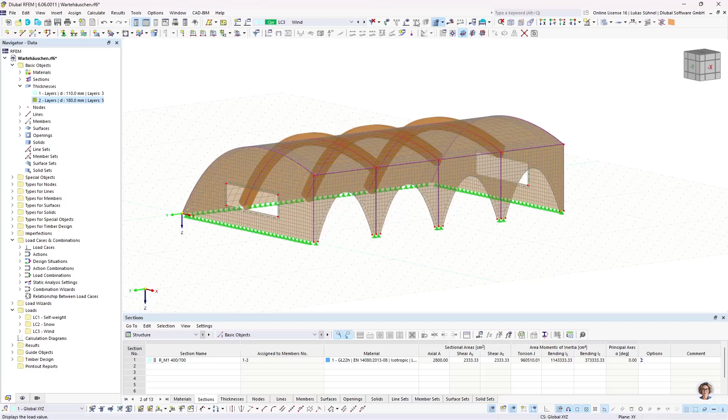And we can also see that I have here these line hinges defined, and all the things that I showed here. And if everything is fine, we can also run a calculation and get the results. This step, running the calculation, can also be triggered via the Grasshopper component - so that's also possible.

All right, that should be it from my side. I hope I was able to show you some new stuff, some helpful workflows, maybe regarding the numbering and the line hinges. And I thank you for your attention. In case of questions, you know how to contact us. And for the rest of the webinar, I hand it back to Andreas.